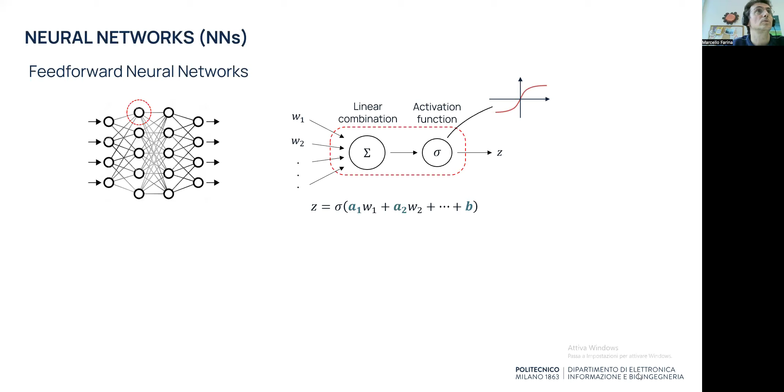In this talk, I will not talk about feedforward neural network-based control systems, but about recurrent neural networks. Roughly speaking, recurrent neural networks are structures very close to feedforward neural networks, but they allow for feedback connections between neurons.

Very generally in this talk, we will describe the evolution of the states of the network according to a discrete time equation. Basically, what we will do is use them to represent the dynamics of some plants, and later the dynamics of control systems.

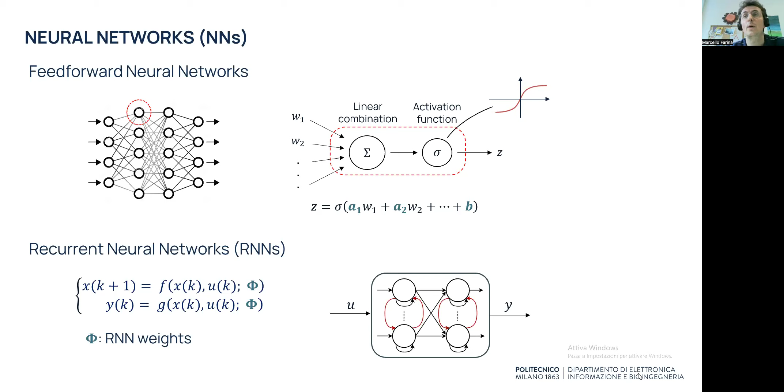Just like feedforward neural networks, recurrent neural networks have a number of unknown parameters to be properly learned during the learning phase, and we will generally refer to them as the recurrent neural network weights, here called phi, capital Phi. Well, all of us know what the progress in neural networks in society has been.

They are widely used in many applications: image classification, speech recognition, bioinformatics, strategic games, and so on.

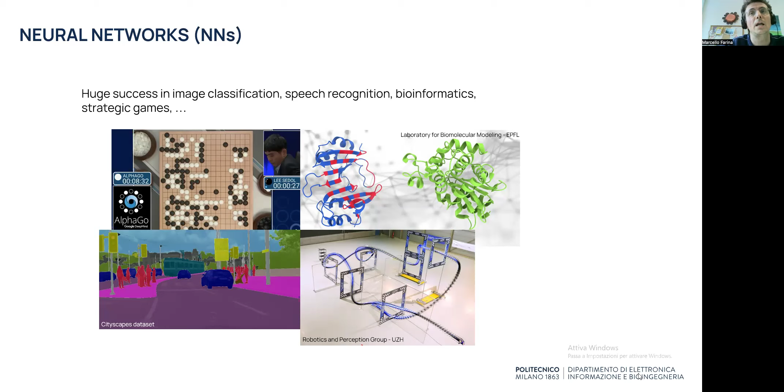But in this particular talk, I want to focus on the connection between the use that we can make of neural networks in the design or analysis of a control system.

The connection between neural networks and control systems exists for many years; it's not something related to the last few years. We can think of earlier works, for example made by Professor Eduardo Sontag in the 90s. The paper I'm mentioning here was written in '92, but there are many works he did in those years about neural networks as system models and controllers.

But there are also other works that establish very clearly a connection between neural networks and how to use a neural network in the design of control systems.

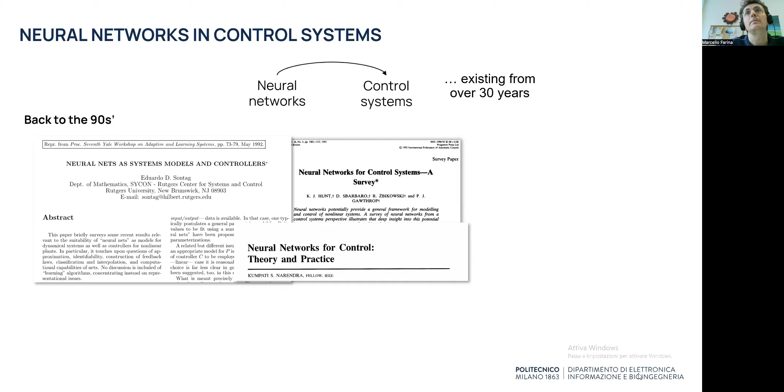Those advancements were spurred by many interesting results about, for example, universal approximation properties of neural networks, and about the possibility of training neural networks using backpropagation algorithms, whose properties were studied exactly in those years, in the late 80s.

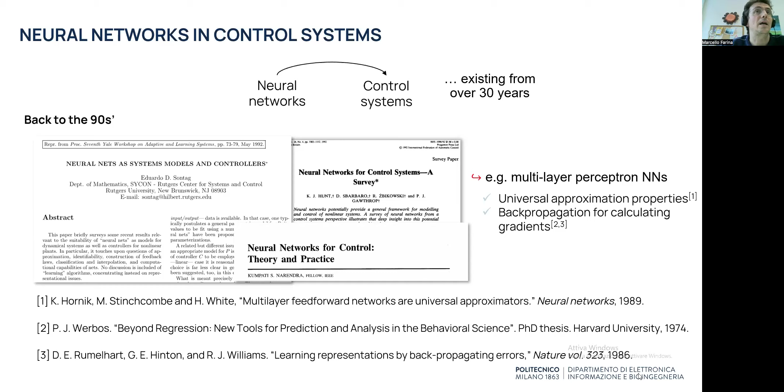Why is it worth now going through those results again, or finding new results? Well, of course, now the time is ready for using them in control systems, first of all in view of the fact that new neural network architectures are available.

So there is much more room for research about all the architectures that are studied nowadays. Also, new optimization algorithms have been developed recently that allow for learning these models.

Also, some very powerful computing tools are available, like TensorFlow and PyTorch, that allow for very easy learning of a very wide range of neural networks, like gated recurrent units, LSTMs, or also the networks that we are dealing with in this talk.

And also there are new tools in control theory that allow for analysis and design in the nonlinear framework, which is the framework in which these recurrent neural network models fall, and so these tools can be used efficiently for control design, for example, as we will do in this talk.

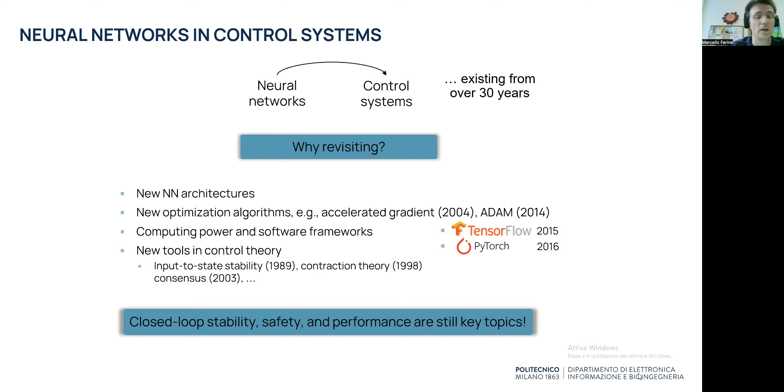So there are many issues remaining open, among which closed-loop stability, safety, and performance, which are definitely worth investigating in these years. In this talk I will just talk about a very narrow range of results, and I think there is room for a lot of exciting research on this topic.

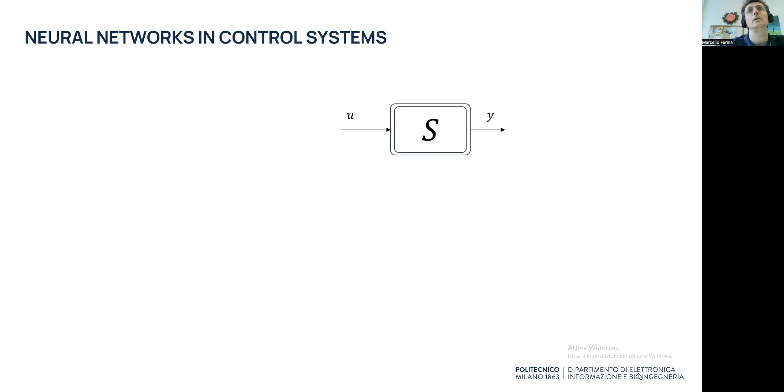Okay, now we start with a system, with a plant, and we assume that inputs and outputs are available, but the dynamics of this plant, which is assumed to be complex and described by a nonlinear model, is not available. But what is available is a batch of input-output data.

The main assumption is that we devise a suitable model based on recurrent neural networks of the dynamics of this system. The aim now is to design a suitable controller that can confer some stability properties to the control system. Of course, in this framework, the regulator can also be designed in such a way that its model is a recurrent neural network.

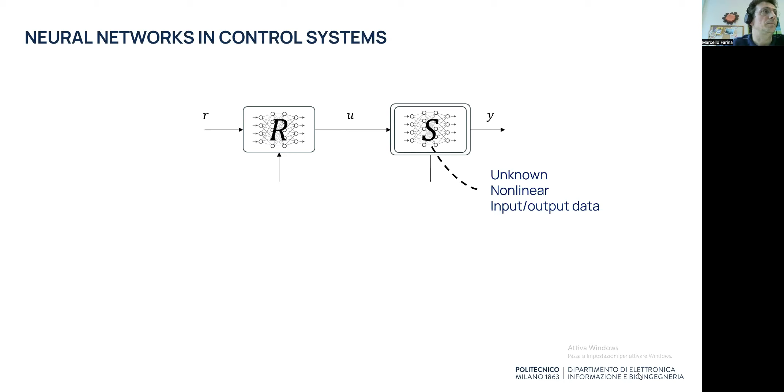This is fruitful for many reasons, among which the fact that, in order to control a nonlinear system, often a nonlinear controller is more beneficial. But also, if we take as a regulator the same structure of recurrent neural network that we took as the system, then we can use a common framework, a common tool for analyzing the stability and designing the regulator parameters in such a way to confer input stability properties in this particular case.

So the objective of this talk is to show you how we can design a neural network-based control system directly from data, guarantee closed-loop stability properties, and also, if I have time, show you how some desired performances can be enforced on the closed-loop system, using a virtual reference feedback tuning algorithm.

In the particular case of the networks that we consider in this talk, this will be done using linear matrix inequalities, which is a very efficient tool from the numerical point of view, which is extremely efficient in my opinion.

Let me cast this approach in a framework. What we are basically explaining here is how to adopt a so-called indirect data-based design procedure, which is based first on the definition of the model of a system, and secondly, using the model of the system, defining the controller. There are other approaches called direct data-based design, which allow directly designing the regulator using data.

As we will see, in order to guarantee the performance, we will use a hybrid approach where a direct approach will also be used for directly enforcing the performance. But this is something we will see later on.

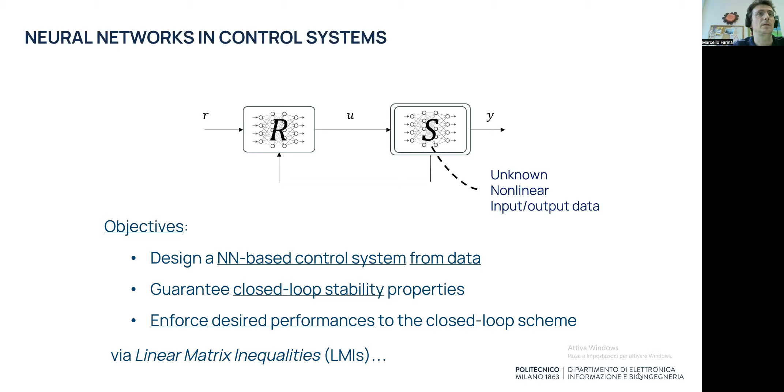Okay, let's establish some preliminaries. I know that in this framework, many of you are much more skilled than me, especially in the technical details of this theory. But I wanted to present a couple of slides on incremental input-to-state stability, which is the main technical tool that I will use, especially for representing the notation that I will use in this talk.

Starting from the system model, which is a discrete time model presented up there - sorry, I need a laser pointer up here - the incremental input-to-state stability property is defined by feeding this model with some initial conditions and with some input sequences.

Basically, the point is, if we feed the model with two different initial conditions and two different input sequences, then we obtain two different state motions. And if the system enjoys the incremental input-to-state stability property, we can bound the difference between the two state motions with a sum of two functions.

These two functions basically are: one part is a function which depends on the difference between the initial conditions and converges to zero over time. So the larger the difference between the initial conditions, the larger this value is. But if we proceed over time, this value tends to zero, plus a term which depends on the difference between the two input motions.

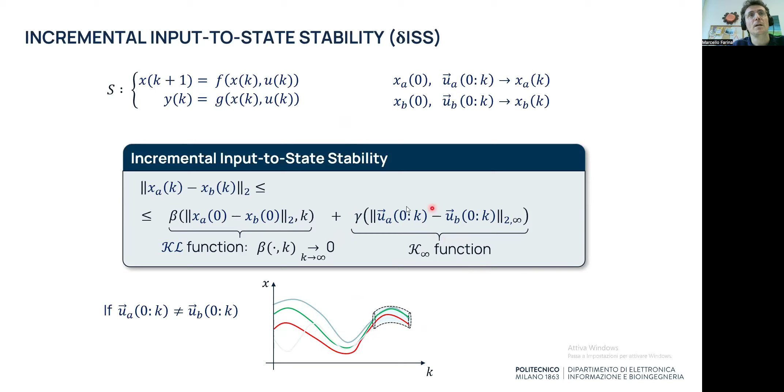Okay, how do we guarantee that a system enjoys delta ISS, the delta ISS property? Well, it can be proved by guaranteeing that there exists a delta ISS Lyapunov function for the system. Basically, a delta ISS Lyapunov function is a function of the two different state evolutions.

Okay, which can be upper and lower bounded by K infinity functions of the difference between the state, and whose evolution can be bounded by minus a K infinity function of the difference between the states plus a K function of the difference between the inputs which are applied at time k.

Basically, if you think about ISS Lyapunov function, this is very, very similar, but instead of considering absolute values of the states, we use differences between the states and the inputs at any time.

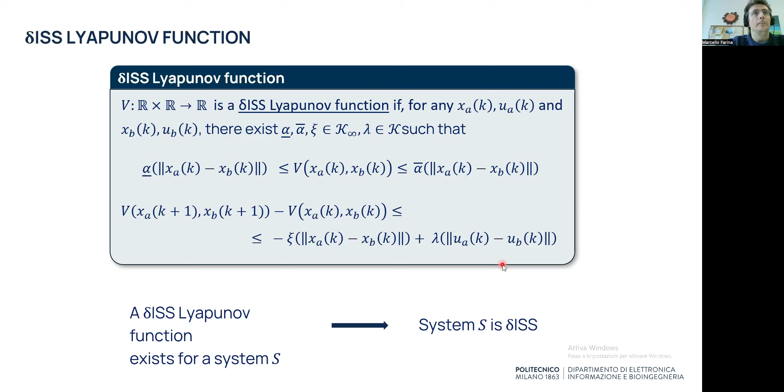So basically the main tool that we will use to confer the delta ISS property will be to enforce the existence of a Lyapunov function for the system or for the control system that we will analyze. We start from the control system.

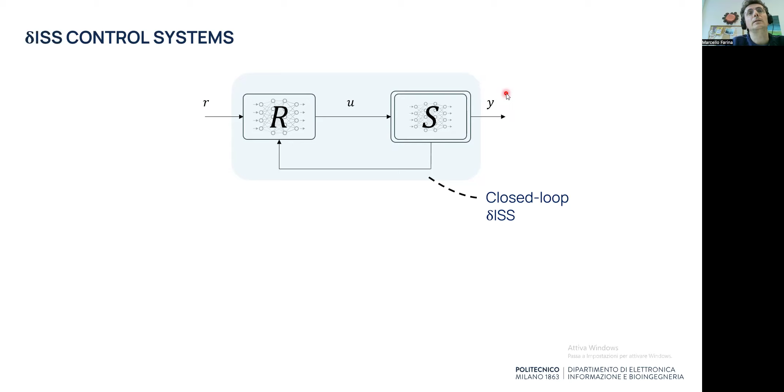Why is delta ISS useful to be guaranteed in this particular case? Well, the main point is that if the system enjoys a delta ISS Lyapunov function, with respect to the input, which is now the reference to the control system, we will have convergence of the output to a certain point, effectively independent of the initial condition of the system when we control.

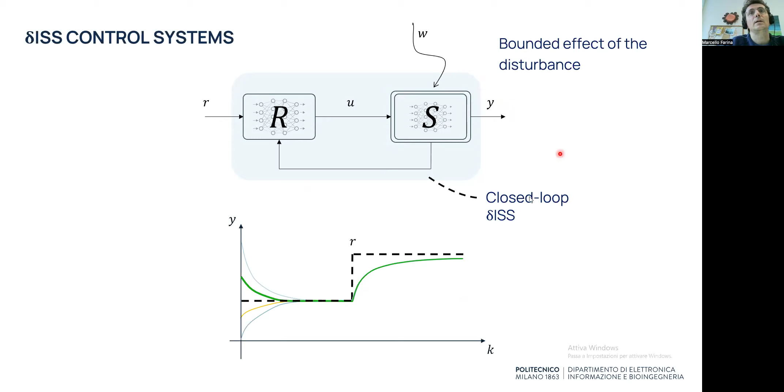The Lyapunov function is very important because it guarantees some robustness with respect to disturbances acting on the system. So to bounded disturbances, we have a bounded effect of those disturbances on the state, the output variables that we are measuring.

Now what kind of recurrent neural network do we consider in this talk? This is a very simple class. If I have to be honest, recently we are greatly extending the results to classes which are much more informative than this class. But the starting point of our research was this class, and so I think it would be clearer to present the results by starting from this rather simple class.

Instead of considering more complicated structures which make everything more complicated, I will start from this class, which is a very simple single layer recurrent neural network where we have an activation function that we call f, which is applied to a linear combination of states and input. This is a linear function of state and input, and the output is linear.

Now, the nonlinear function f is composed of functions that must be applied element-wise to the elements of the vector that is inside here. But we don't consider just nonlinear functions. We may consider also some identity functions which represent the fact that some of the lines here of this function may be linear. So we are not excluding a priori some linearities in the model.

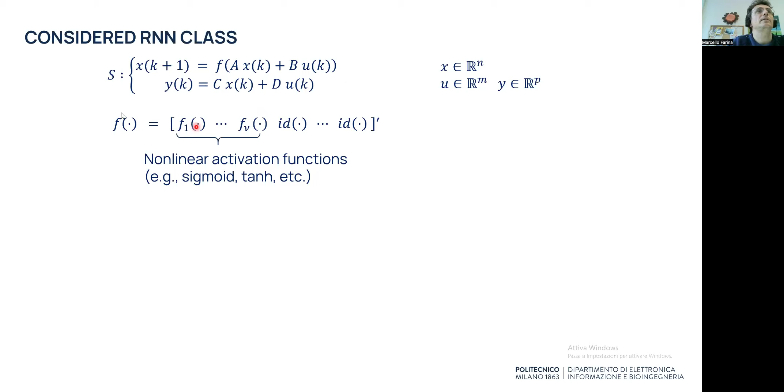The main property that the function f should satisfy is that normally f is a sigmoid function, and in this particular case we ask the function to be Lipschitz continuous, and in particular we assume that a global Lipschitz constant exists and is defined as LPi for each element of this nonlinear part. We call LP1, LP2 up to LP nu the Lipschitz constants of these components, while of course the identity function that allows to define the linear parts of this model is of course equal to 1.

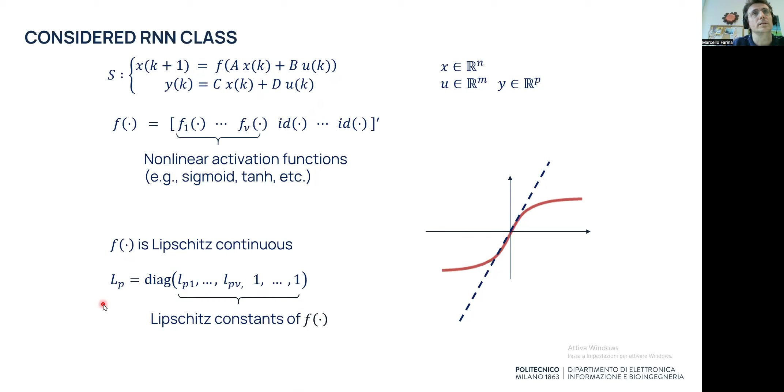We collect all these Lipschitz constants into a matrix LP, which is a diagonal matrix just containing all these constants. Now the main result that I will show you, also the sketch of the proof in a few minutes, is this one.

We can prove that this model here is delta ISS if there exists a matrix P that allows us to solve this Lyapunov inequality here. Basically, the Lyapunov inequality applies to LP, which is the matrix of Lipschitz constants, times A, which is the transition matrix of the linear part.

Now, of course, there is a trick here because not all the definite positive matrices P allow us to prove the delta ISS property of these nonlinear systems, but only structured ones. In particular, the matrix P should be block diagonal, where the first part must be purely diagonal, and the second part does not necessarily have a specific structure.

So every time we have a nonlinearity, the corresponding Lyapunov function must enjoy some diagonality, while for the linear parts we allow for a more free structure of the Lyapunov function matrix, the Lyapunov inequality matrix.

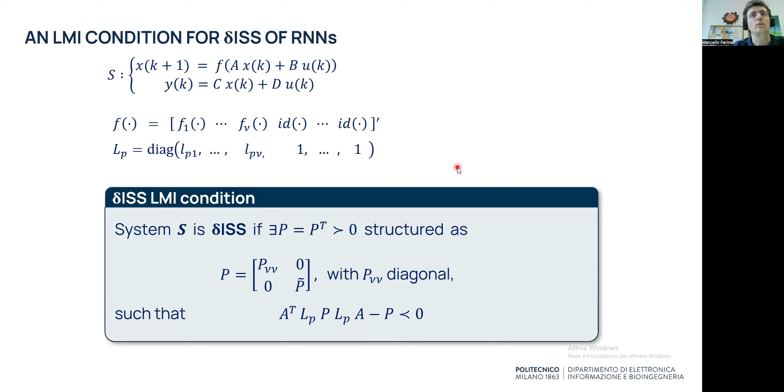In order to show how to prove this result, I will show you that basically this candidate delta ISS Lyapunov function is indeed a delta ISS Lyapunov function. Basically, we define V as XA minus XB transpose, P, XA minus XB. So basically this is how we will define a Lyapunov function also in the linear case, with the quadratic one.

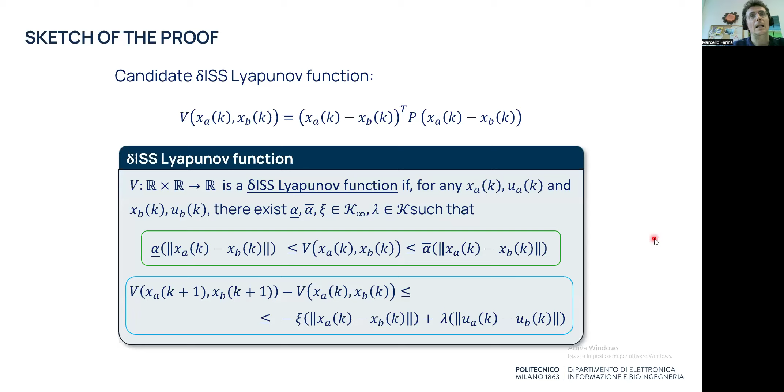And this is very standard. Now, of course, I will show you that it enjoys the two main properties that allow us to guarantee that it is indeed a Lyapunov function.

Let's start from the first one. Well, of course, since P is a definite positive matrix, we can upper bound V using the minimal and maximal eigenvalues of matrix P, because it's symmetric and positive. Okay, so this is a totally standard thing.

Well, I think the most insightful and interesting part is the second one. We start by representing the evolution of the difference between the states, XA and XB, by applying the evolution of state XA computed by applying function f to A times XA plus B times UA. We call this VA for brevity, minus f applied to VB, which is A XB plus B UB.

Now, the main trick here is to add and remove this part, the matrix of Lipschitz constants times the difference between VA and VB. We remove it and we add it here, and we call this term delta, while this is LP.

Now, if we write the expression of the Lyapunov or candidate Lyapunov function at time k plus 1, we have this transpose plus times P times this expression. If you look at what I've written here, this is delta V transpose LP, P, LP, delta V, which comes from here. Then we have delta transpose P delta, which comes from here, plus 2 times delta V transpose LP transpose. Recall that LP transpose is LP because LP is diagonal, P times delta.

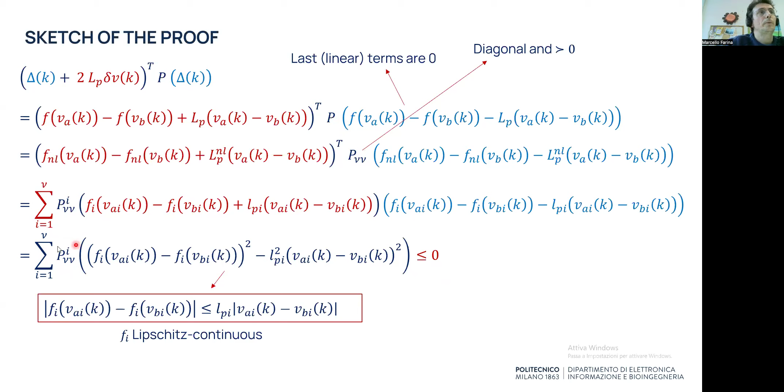And so if we go back to the previous slide, we realize that this part is negative in view of the definite positiveness of matrix P and of its structure. And so the difference between V, the candidate Lyapunov function at time k plus 1, and the candidate Lyapunov function at time k, can be written in this way. If you look closely at how we define delta V, this is the difference of the Lyapunov function in a purely linear case.

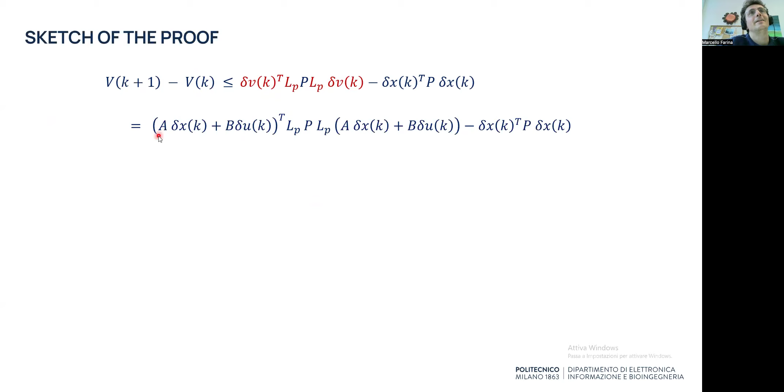Furthermore, the matrix LP times A is surely stable in view of the fact that this Lyapunov inequality is fulfilled with a P which is definitely positive. So in order to prove that this is indeed a delta ISS Lyapunov function, we can use the same tools that we use in the linear case. So I will not go through them again.

But the point is really this: we prove that what we have here is smaller or equal than 0. And so we use linear tools, basically the same tools that we apply in the linear case, to prove the decreasing property of the function V.

Okay, so basically we can prove that V at time k plus 1 minus V at time k can be upper bounded by minus a constant, positive constant xi, times the difference between the state, plus lambda, which is a positive constant, times the difference between the input. This is exactly what we required for V to be a delta ISS Lyapunov function, and so we can prove the delta ISS property of system S.

Okay, so at the end of the game, we have to solve a Lyapunov inequality, just like in the linear case, but imposing a particular structure to matrix P. Okay, this is the trick that we apply.

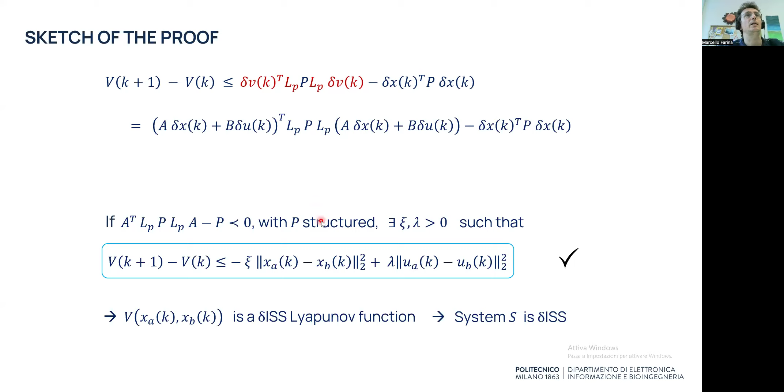Okay, now that we established an analysis condition for simple systems, we use it for the design of controllers where the system and possibly the controller itself are recurrent neural networks.

So, basically the main trick will be this: we start with a model which is identified from data, and we assume that a recurrent neural network model of this type well represents the system dynamics. And what we do is design a regulator and possibly also a compensator, which allows us to improve the performance.

These are of the same recurrent neural network class that we have considered so far in the analysis part. So if we plug together the states of the system, the regulator, and the compensator in a single vector X, we can easily see that the overall control system dynamics can be described by a model that falls exactly into the class of recurrent neural networks that we are studying.

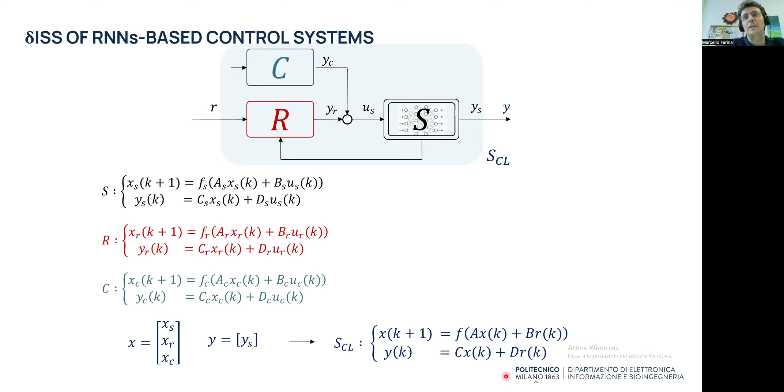Okay, so the point is, of course, the input here is the reference value for Y. So the point here is that we will confer input to state stability, if possible, to this model, and this, of course, will be used to provide very good performances to the control system.

Okay, so again, just to recap, the model of S is given by the data, so it does not present any unknown parameter because we have already identified them in the learning phase. While here we have a regulator and possibly a compensator, which can represent dynamic nonlinear regulators, static nonlinear regulators, or even static linear regulators, if we just remove this part here.

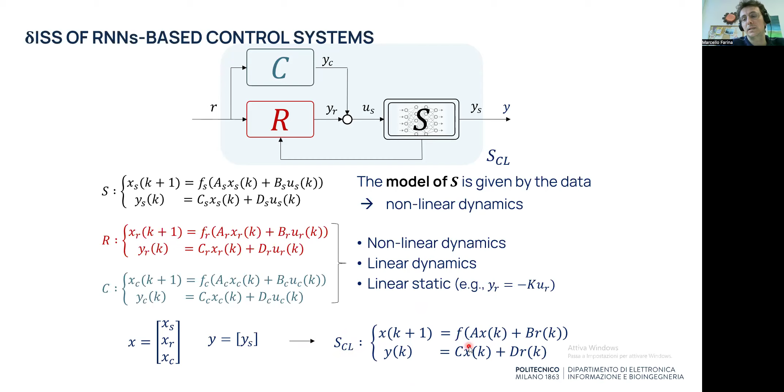Okay, so the main point is that in any case we can represent the closed loop system dynamics in this way and use the result that I presented so far to confer stability properties. So just to be clear, here we have a matrix A, and by just verifying this Lyapunov inequality, we can verify the stability of the system.

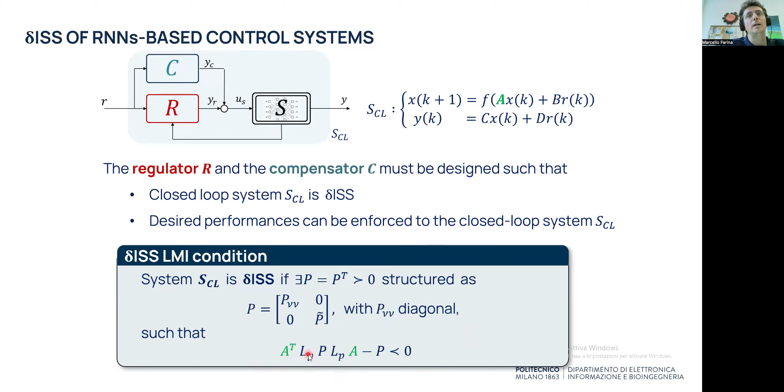Of course, this is not just an analysis problem in general, it's a design problem. So provided that, which is not guaranteed for any structure, but in many cases it will be, as I will show you in the subsequent slides.

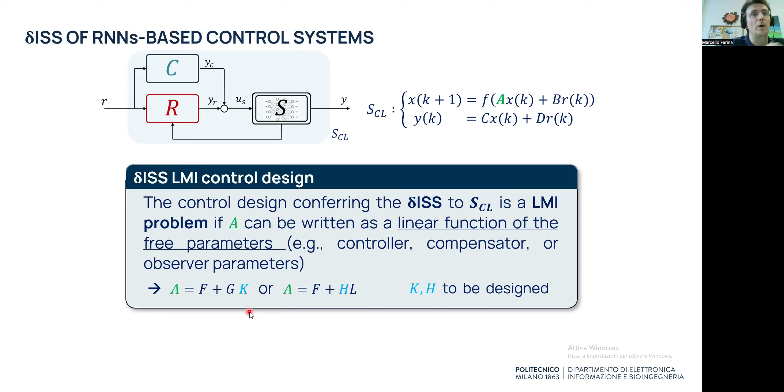If we can define some free parameters of the controller and of the compensator such that we can write the evolution matrix A as F plus GK, or F plus H times L, where L and G come from the model, then we can cast everything into a linear matrix inequality problem, which can be easily solved, allowing us to obtain a very lightweight design problem.

Okay, now there are many questions. I'm listing just some of them here, and I will try to cover them in the next 20 minutes. So, how to design controllers for different configurations? Of course, if we just use the tool that I presented so far, we can confer some stability properties, which may not be enough, especially in many cases.

So we would like to know also how to enforce some performance, possibly in a data-based fashion, because we are assuming to be in a data-based control design scenario. The other research questions are about robustness, because maybe the learning phase does not provide just a unique model, but a set of possible models which could represent the system dynamics. And then I will tackle also the feasibility issues, which are strongly related to the global condition that we are considering now for delta ISS.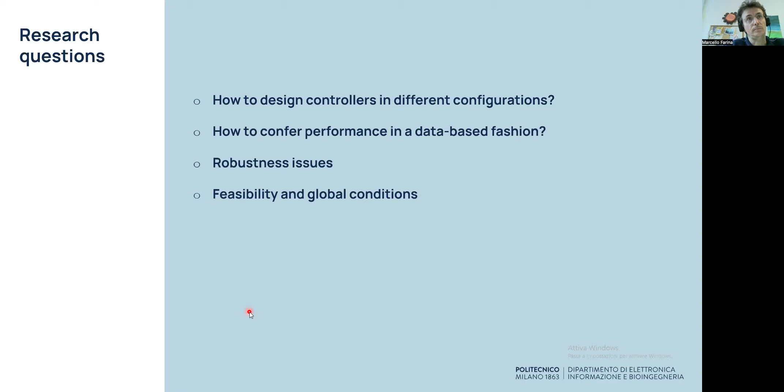Let's consider the case where we want to design a regulator which falls in the class of echo-state networks. Why do we use echo-state networks? Because this is the regulator based on echo-state networks. In echo-state networks, we have a lot of parameters represented by matrices WX, WE, and WU. But some of these parameters may be set as hyperparameters before the design phase. In particular, in this case, we set these three matrices before the design phase, so they are hyperparameters. This is also what normally happens when you learn echo-state networks. I'm not delving into details on how to set them because it's not important in this phase, and we use just K here as free design parameters.

What I will show you is that we can use the Lyapunov inequality that I derived so far in order to design the parameter K to confer delta ISS to the control system. The point is the control system itself can be written in the form I presented so far. To do this, we just plug these equations together and obtain a state space form of the same type considered before.

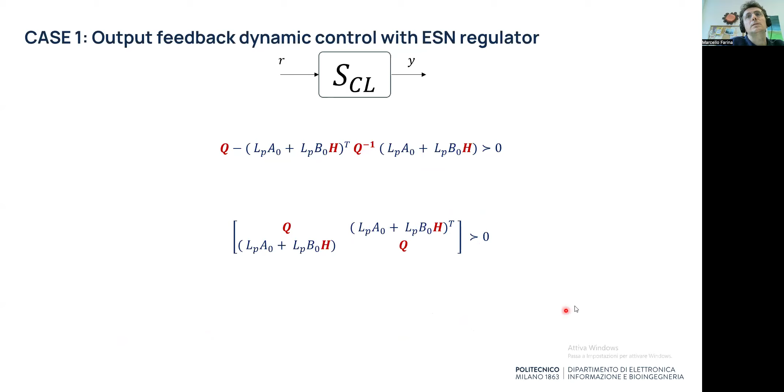So basically, we use the Schur complement to transform this inequality into this, and this is our linear matrix inequality that allows us to confer delta ISS to the system.

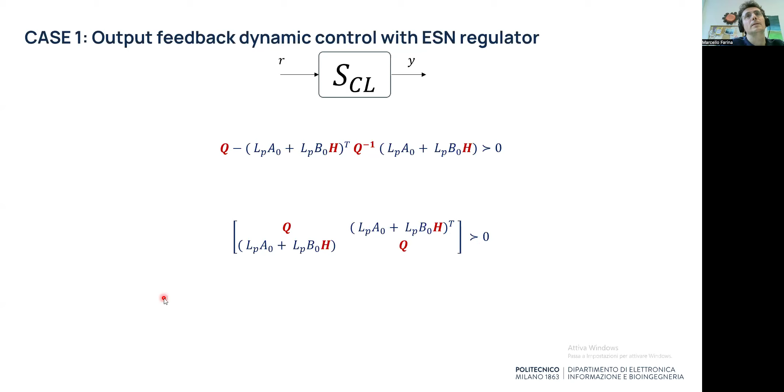Now, in the next slides, I want to simplify the setting to show you also the part related to performance. In order to simplify the setting, I use a state feedback static controller, which allows me to simplify the equations. So instead of considering a neural network here as a controller, I just use a gain, a static gain.

Of course, in order to guarantee some tracking properties, I have to define a reference R, but here I used as a reference the state and the input that allow me to solve this static equation, which comes from the dynamic equation. Of course, not all references can be tracked in general because fs is a bounded function, so not all references can be tracked.

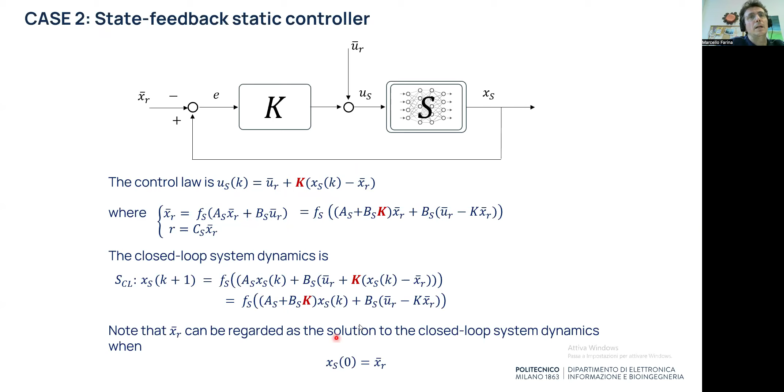But we assume that x bar, u bar is indeed a solution to this equation. So basically this is the control law that we apply in this case, and I will show you that, similarly to what I did before, we can define a design problem allowing us to define K that confers input-to-state stability to our system. So if I plug this control law into the system, what I obtain is exactly this equation. By simply managing this, I obtain the equation where the transition matrix becomes A plus BK, and here I have some inputs that remain that allow tracking the reference.

Now the main point is to realize that this state evolution is exactly the equation in steady state, where, of course, here I'm considering the steady state XR bar instead of X. The point here is that if I start with X as a steady state, basically I remain there. So if this equation enjoys delta input-to-state stability, that automatically implies that XS will converge to the steady state, because if I change the initial condition, I will converge to the same solution obtained by the static equation.

So basically the point here is guaranteeing static performance and stability just by solving my particular Lyapunov inequality applied to this matrix here, AS plus BSK. And of course, as I told you, this will guarantee that XS will converge to the state that corresponds to the reference.

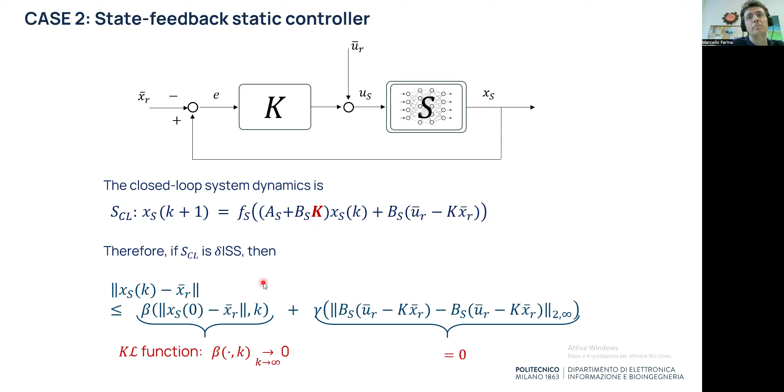Of course, this is a very similar problem to the one before, so I'm not devoting time to show you that this can be cast as a very simple linear matrix inequality problem.

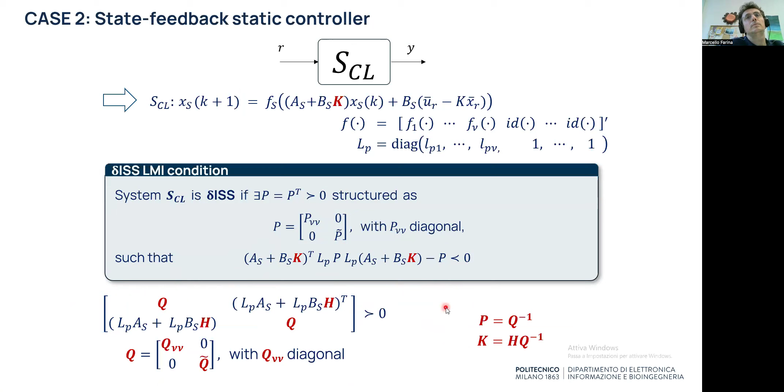Now, there are two questions that arise here. The first question is: here S is a recurrent neural network, so it's not a physical model. The state of the recurrent neural network does not correspond to any physical variable, so I cannot assume that XS is measurable. And of course, this is totally true. For solving this problem, I will show you that a simple observer can be designed.

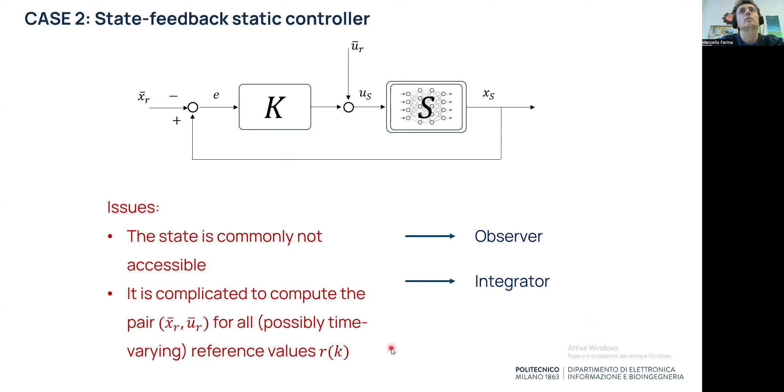The second issue is that when I change a set point, I should automatically know a UR bar and XR bar that allow me to track that change in set point. So if I want to avoid an automatic computation of the set points, what can I do? Of course, you can do it by adding an integrator to the control system, exactly like you do in the linear case. Okay, so let's see how we can design an observer.

An observer is designed by just replicating the system equation and adding a correction term, which depends on the residual—the difference between the actual output and the estimated output obtained using x hat s, the estimated state in the output equation.

Now, we can rewrite the system equation as A minus LC times something, where L is the observer gain. Why did I rewrite it this way? Because I want to show you that we can write the system equation in exactly the same form as the observer equation, with the same 'something' term appearing in both.

Why do I say this? Because I want to point out that if, as the initial condition of the observer, I take the initial condition of the state, the observer state is automatically equal to the state of the system. This allows us to say that, provided the system enjoys delta input-to-state stability, if we start with the observer at a different initial condition, the trajectory of x hat will necessarily converge to the trajectory of the state, by definition of the delta ISS property. This allows us to prove convergence of the observer error to zero.

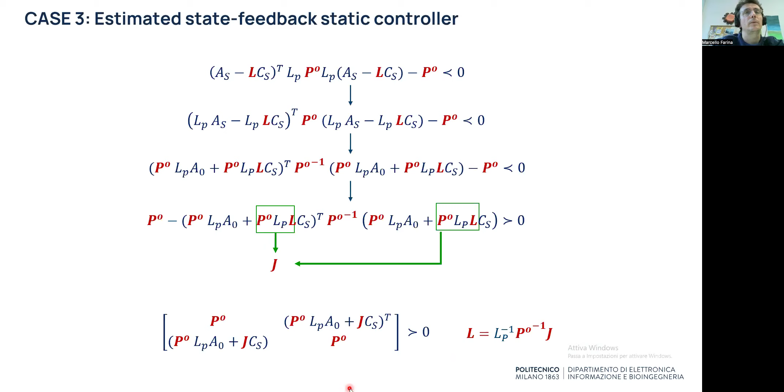Now, the main point is: I'm feeding back the estimated state, but I can write the estimated state as xs minus the observer error, and the observer error goes to zero. So if you write the system equation using the same controller as before, but with x hat appearing, you see that the same equation can be written, but with a further perturbation to the state equation, given by Bs times the observer error.

Since we are able to confer delta ISS to this system through our Lyapunov equation applied to this matrix, when this vanishing disturbance goes to zero, this allows us to prove that xs tends to the set point. So we apply a sort of separation principle, because the observer error appears as a disturbance in a delta ISS system equation.

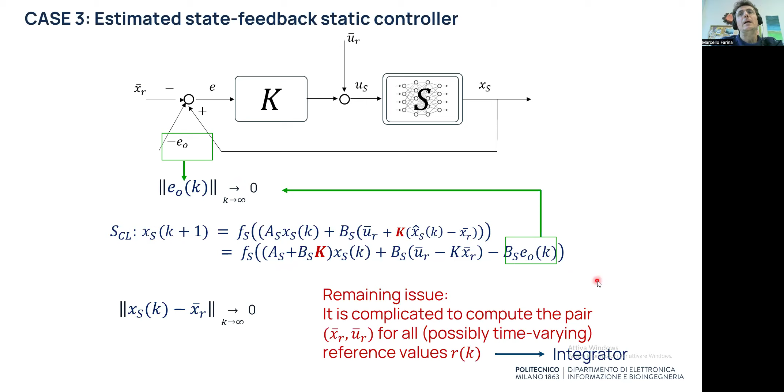The other issue is: what if I don't know the steady state? We can use an integrator. Basically, we add an integrator that integrates the control error, and we provide the estimated states to the gain. We can easily prove, using the same argument as in the linear case, that the only possible steady state for this control system corresponds to having the control error, R minus ys, equal to zero.

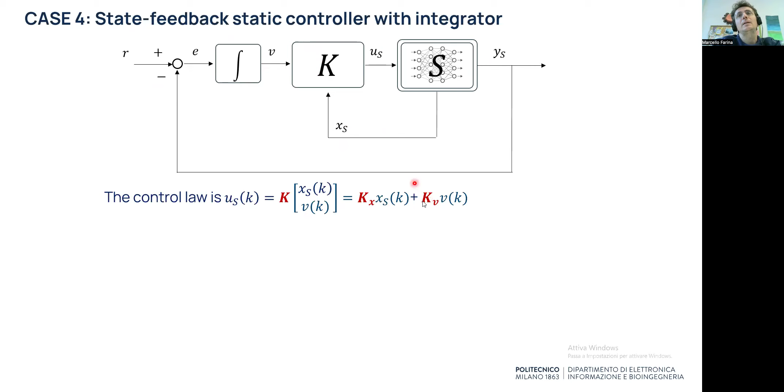This allows us to say that if we guarantee stability properties to the control system, that stability will lead to convergence of ys to the reference. Now, the control we apply here is U equal to K times a vector composed of both xs and v, so we have a gain multiplying the state xs and another gain multiplying the integrated error, which we call v.

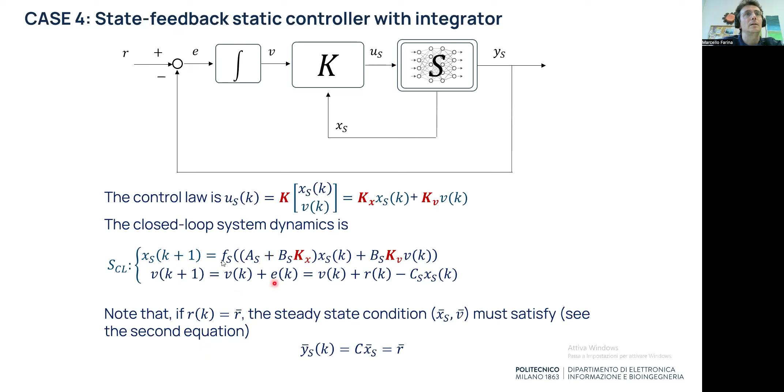The trick here is the same, so it's not crucial to delve into details, but the point is I put the equation of the integrator and the state evolution together, using Kx and Kv in the equations representing the input. At the end, I obtain a state evolution exactly represented by our recurrent neural network model, where the state, instead of just being xs, is composed of xs and v together—the state of the system plus the state of the integrator.

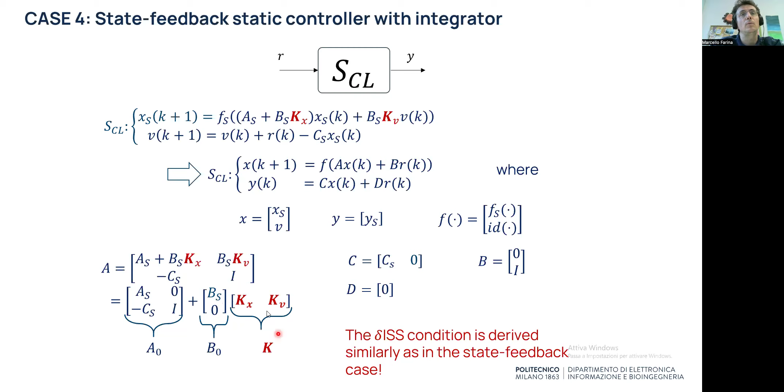F has the same structure we needed: the first entries are nonlinear, and the last entries are linear, because the integrator equation entries are linear. So at the end, we obtain a transition matrix written as A0 plus B0K. Here, again, we use the same LMI as before to design the gains Kx and Kv, collected together in a gain matrix K. So we use exactly the same tools.

Now, the next point is: how do I guarantee some performance?

As you can see, I obtain some conditions which are somehow flexible in the sense that there is no one solution, but there is a plethora of solutions. If the LMI is feasible, we have a plethora of different solutions, but there is no way to decide which solution is the one that allows us to confer some performance. Furthermore, in general, for nonlinear control systems, it's not very easy to find standard tools for guaranteeing performance. And plus, we are in a data-based framework. So what I'm suggesting here is, why don't we use directly the data to confer some performance?

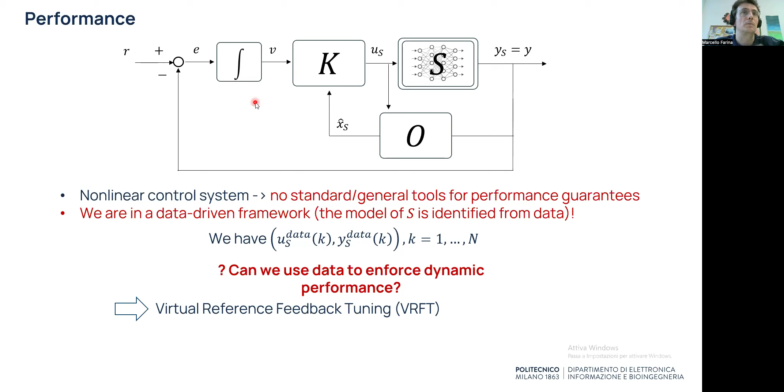The approach that I'm suggesting is the use of virtual reference feedback tuning, which is quite efficient, especially in some particular cases that we have tested, but I'm not showing the result here. So the point is this.

If we take this control system and represent it as a system with R as input and Y as output, this is a block of this type. We have data which are related to the plant, and the idea is to tune the free parameter, in this case K, the gain K, in such a way that the model of this closed system is as close as possible to a reference model m_ref that I'm predefining.

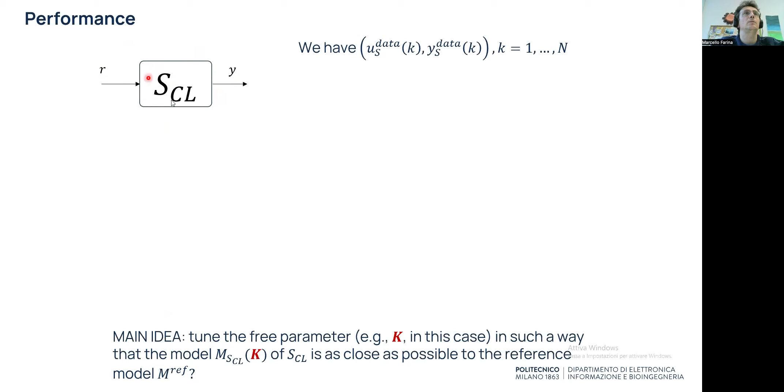The idea of virtual reference feedback tuning is very simple. We have Y, and if the system behaves as we want, we can invert the model ref to obtain what will be the virtual reference R, in such a way that with the specific reference model that we want to impose, Y behaves as the data that we have.

So the point is, if we had an optimally tuned controller, and by the way, a controller which has the structure that we need, because not all controllers will allow us to get those results, if we have this as output, the input will be the inverse of the reference model times the data that we have. And we put it here.

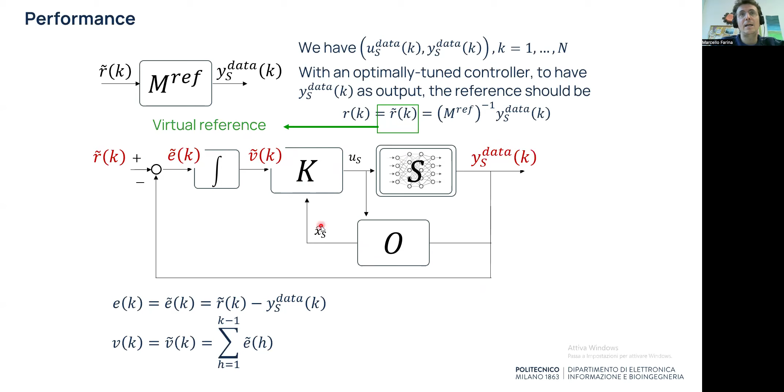Then, using this data and the output data, we compute the virtual control error. By integrating the virtual control error, we obtain the integrated virtual control error. And these are data, because once we know this, we can compute this by inverting the reference model, we can compute this, and we can compute this. Now, also the U's are data, and also the X's can be defined as data, because we just obtain them by feeding the observer with input and output data.

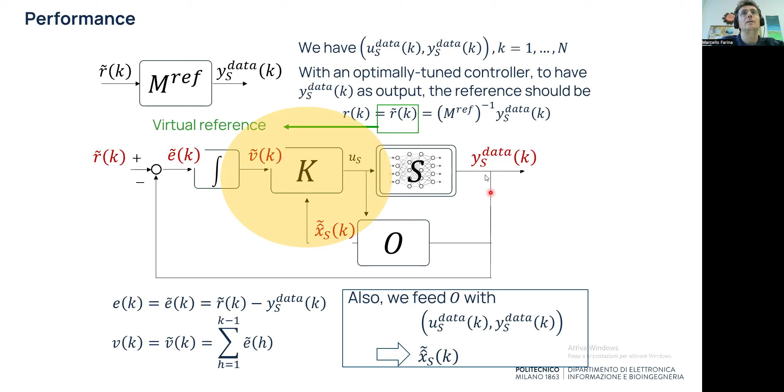So if you just focus on this part, you can see that we want to tune K in such a way that if properly fed by data x_hat and data v_tilde, the output is equal to the data that we have. So if you just write it in equation form, we can write it in this way.

We want to tune K in such a way that K times some data that we have on some time instance is exactly equal to some data that we have. Of course, this is not possible in general, because the equality is practically impossible to have, at least because we have some noise on the data.

But we can cast this as a least squares problem. What we can do is minimize the cost function that allows us to minimize the difference between this and this part. And we can see that this is a least squares problem where K is an unknown.

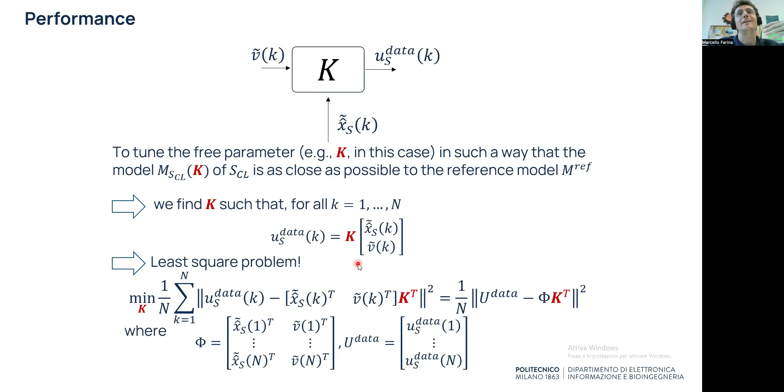But of course, in view of the fact that the controller may not be the optimal one that allows us to obtain the reference model, in view of noise and other features, this may turn out to be even an unstable controller. So what is better to do? Let me skip some details. What is better to do is to minimize K, but keeping in mind that we have to guarantee stability, and the stability, of course, is guaranteed by the linear matrix inequality that I derived before.

Well, this thing is a little bit tricky because the linear matrix inequality does not have K as a free variable, but H, which is the product of K times Q. So this makes everything nonlinear.

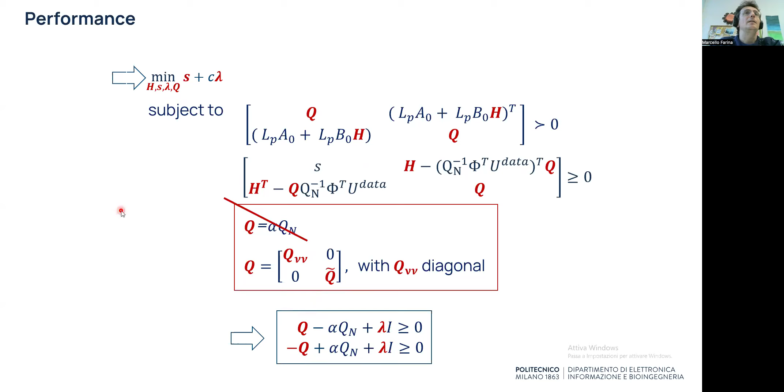Unfortunately, I don't have much time, so I will skip these details, but I will show you that with some approximation, we can bring this problem into a problem which is in Q and H. In this way, we can not only guarantee the stability enforced by this inequality, but also guarantee performance by properly minimizing the cost function that we retrieve thanks to the virtual reference feedback tuning approach.

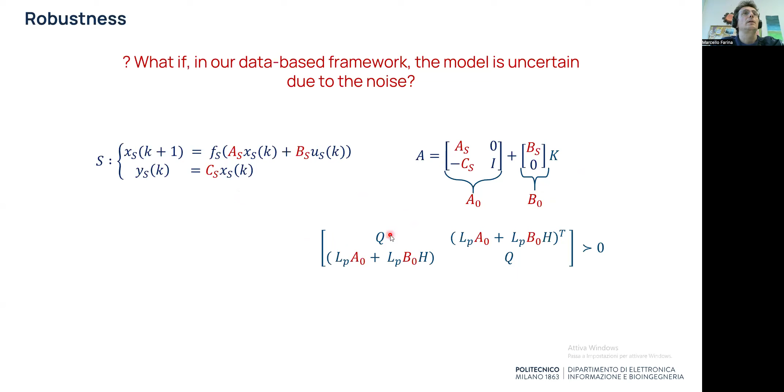Lastly, I want to talk about robustness, because as you may imagine, the model of the system that we derived by learning may be uncertain. What can be proposed is, instead of using a nominal model of the system in our LMI, using some set membership tools, we can define a set of models of which the real one is a linear combination.

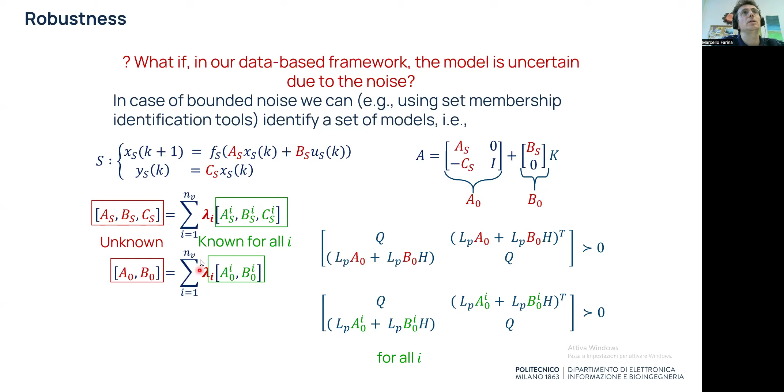So basically, in order to confer stability, we don't solve the LMI for a nominal model that we don't know, but we solve it for the vertices of some polytopes containing the limit model parameters. By solving this LMI, which confers stability to the limit models, we can confer stability to all the models that can be described as linear combinations of those models. The identification of these limit models can be done using very standard set membership tools.

Just a few words on feasibility. I think the main question here is whether this design problem is always feasible or not. Well, of course not, in view of many things. First of all, this comes from the fact that the condition we derived is conservative.

One reason for this conservativity is that we are solving this feasibility problem for functions that have the same Lipschitz constant, so we are not focusing on the specific nonlinearity we are considering. We guarantee stability, but not just for the specific model we have, rather for all models whose nonlinearity can be described in the same way. This brings a lot of conservativity into our design problem.

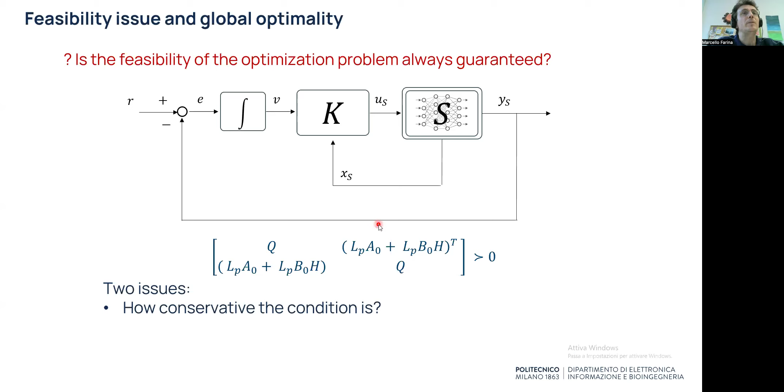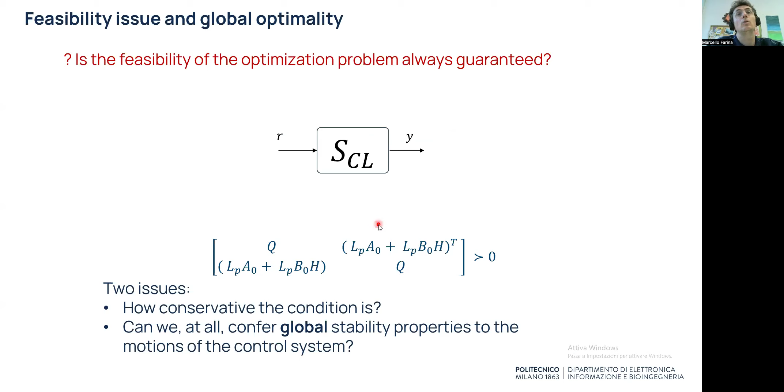The second thing is that, if you've noticed, we are guaranteeing a global stability property, but especially when dealing with bounded nonlinearities, global stability properties cannot always be conferred. Here's an example: assume that in view of the sigmoidal structure of the system, y cannot take values greater than a certain value y max, and we ask for a reference which is greater than that.

Of course, we cannot have global stability, because if we give a reference greater than the maximum value of y bar, we have an integrator which continues integrating that variable. So inherently, in our LMI problem, we have the impossibility of getting feasibility when this variable is bounded. If you test this inequality, you'll see you have to insert some nonlinearities, otherwise you can never get feasibility. This is a structural thing.

So what we are currently doing with some collaborators is studying local or regional stability concepts, because only that way can we define specific stability-enforcing LMIs that apply to any type of nonlinearity of this type, not only to specific structures where we enforce nonlinearity just to guarantee that the output can possibly be unbounded.

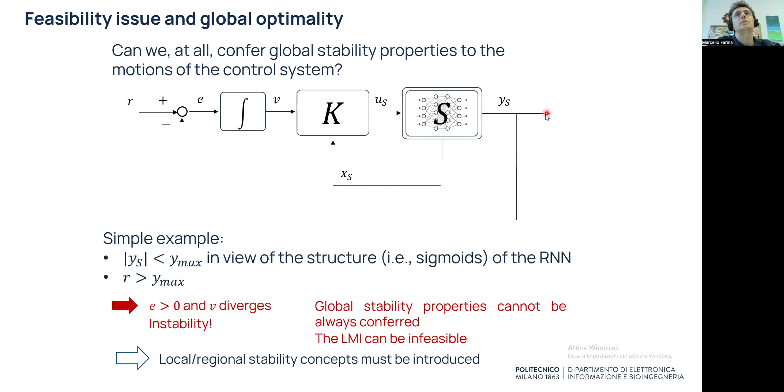Just to draw some conclusions before leaving the floor for questions, I want to point out some take-home messages of this talk. First, the incremental input-to-state stability property is a very interesting property to confer to control systems. For some classes of recurrent neural networks, this property can be conferred even using linear matrix inequalities, and there are ways to confer robustness and performance even directly from the data.

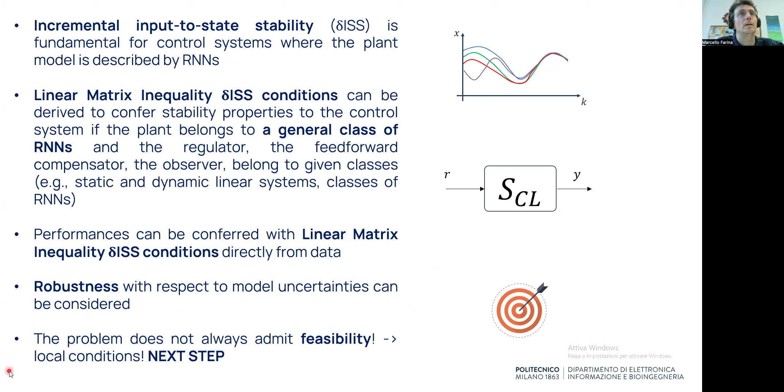One of the main points here is that we don't always have feasibility. So the next step of the research we are currently studying is exactly to derive conditions that guarantee local stability instead of global, because the global one brings too conservative linear matrix inequalities.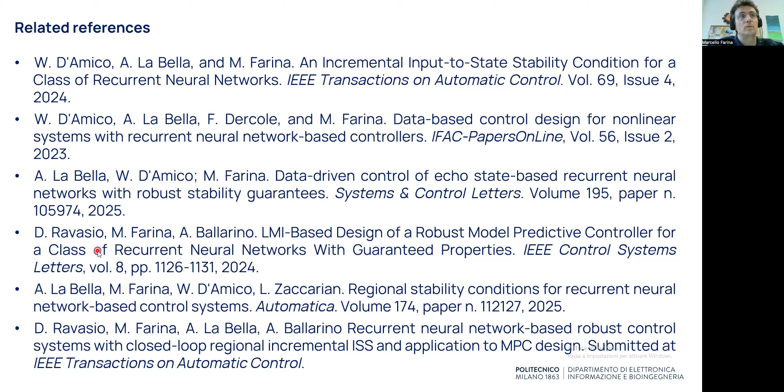These are some papers we wrote on this topic. This talk is, not following exactly the first paper, but a simplified version of it. I presented the main concept of this paper, but we developed this theory further, in particular some local or regional stability conditions, and we used these to derive auxiliary control laws for MPC, conferring performance not through virtual reference feedback tuning in these works, but directly using a model predictive control whose soundness is guaranteed by the conditions I've talked about in this talk.